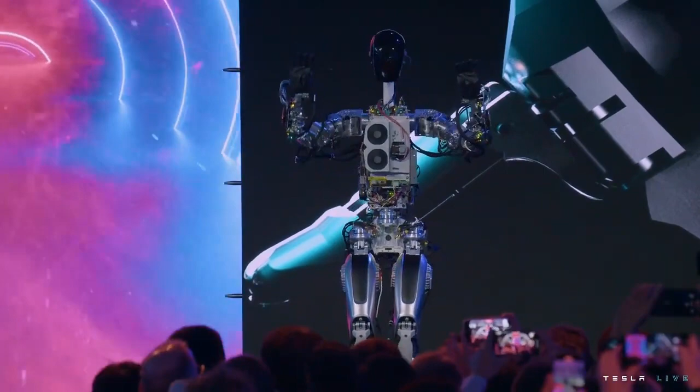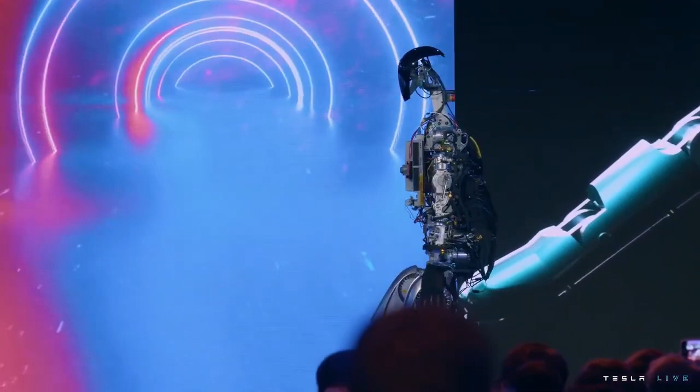So this is essentially the same full self-driving computer that runs in your Tesla cars, by the way. This is literally the first time the robot has operated without a tether. It was on stage tonight.

So the robot can actually do a lot more than we just showed you. We just didn't want it to fall on its face. So we'll show you some videos now of the robot doing a bunch of other things, which are less risky. We should close the screen, guys.

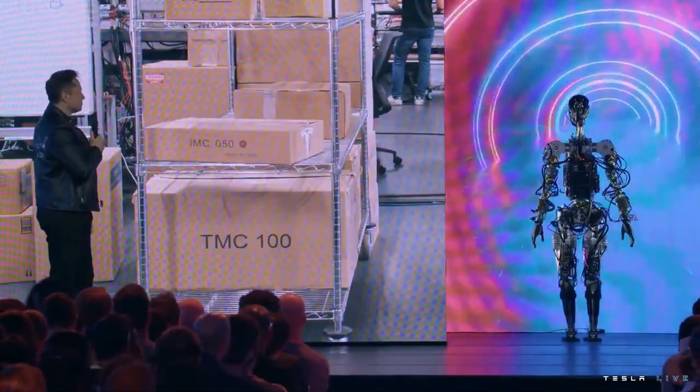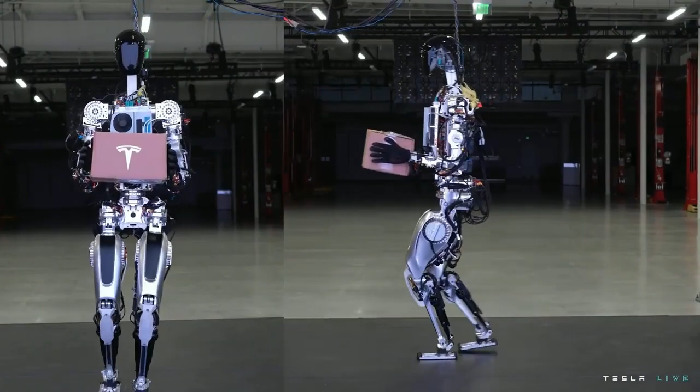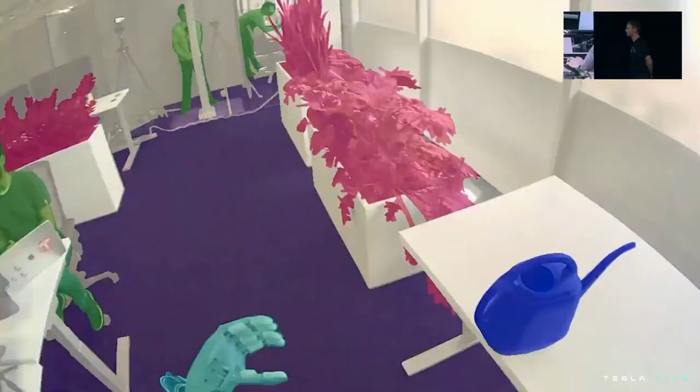We wanted to show a little bit more what we've done over the past few months with the bot, just walking around and dancing on stage. Just humble beginnings, but you can see the autopilot neural networks running as is, just retrained for the bot directly on that new platform. That's my watering can. When you see a rendered view, that's the robot, that's the world the robot sees. So it's very clearly identifying objects, like this is the object it should be picking up.

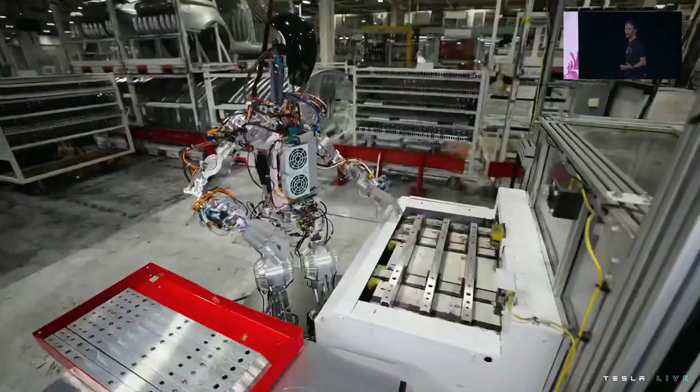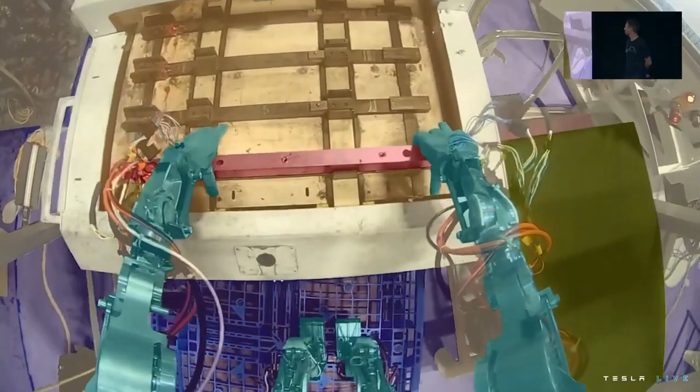We use the same process as we did for Autopilot to collect data and train neural networks that we then deploy on the robot. That's an example that illustrates the upper body a little bit more, and something that we'll try to nail down to perfection over the next few months. This is really an actual station in the Fremont factory that it's working at.

And that's not the only thing we have to show today, right? Yeah, absolutely.

So what you saw was what we call Bumble C, that's our sort of rough development robot using semi-off-the-shelf actuators. But we've actually gone a step further than that already. The team's done an incredible job, and we actually have an Optimus bot with fully Tesla-designed and built actuators, battery pack, control system, everything. It wasn't quite ready to walk, but I think it will walk in a few weeks. We wanted to show you the robot, something that's actually fairly close to what will go into production, and show you all the things it can do. So let's bring it out.

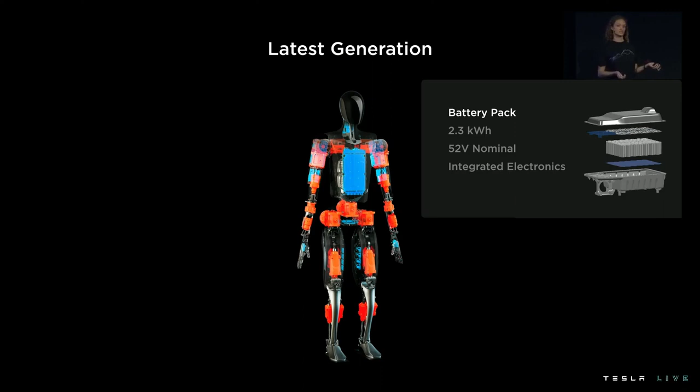Moving on to the brain. It's not in the head, but close, in the torso, acting as our central computer. Tesla already ships full self-driving computers in every vehicle we produce, and we want to leverage both the autopilot hardware and software for the Humanoid platform. But because the requirements and form factor are different, we're changing a few things. It still does everything a human brain does: processing vision data, making split-second decisions based on multiple sensory inputs, and handling communications. It's equipped with wireless connectivity and audio support, plus hardware-level security features to protect both the robot and the people around it.

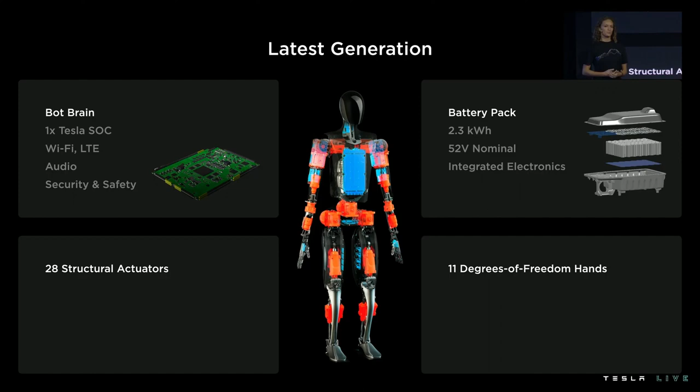Now that we have our core, we need some limbs. We'd love to show you a bit about our actuators and our fully functional hands. But before that, I'd like to introduce Malcolm, who's going to speak about our structural foundation for the robot.

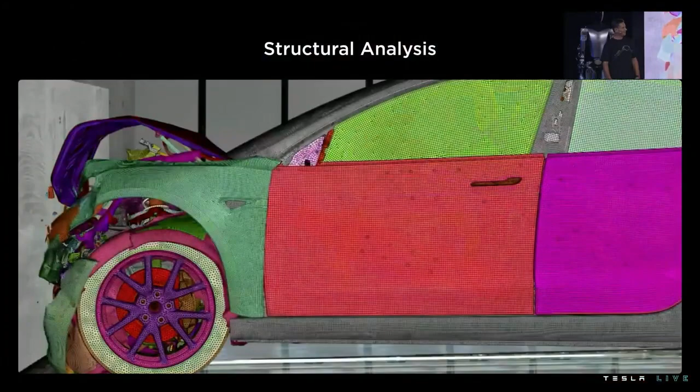Thank you, Lizzie. Tesla has the capabilities to analyze highly complex systems, and they don't get much more complex than a crash. You can see here a simulated crash from Model 3 superimposed on the actual physical crash—it's incredibly accurate. To give you an idea of the complexity, this model includes every nut, bolt, washer, and spot weld, with 35 million degrees of freedom. It's quite amazing, and it's true that without models like this, we wouldn't be able to make the safest cars in the world.

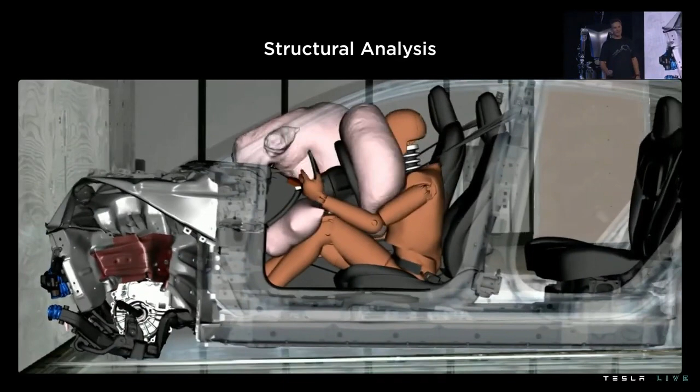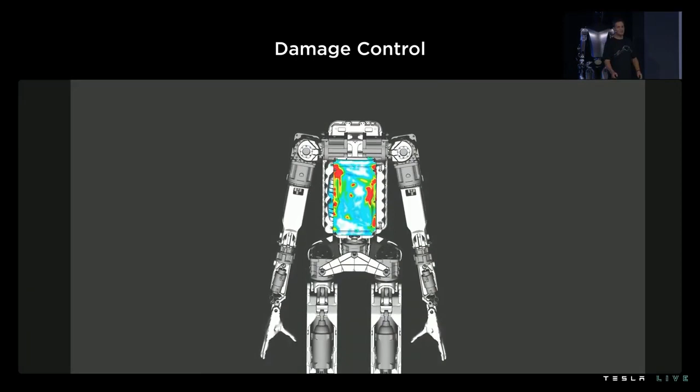So can we utilize our capabilities and methods from the automotive side to influence a robot? We can make a model using the same crash software to make it fall down. The purpose is to ensure that if it falls, ideally it doesn't, but the damage is only superficial. We don't want it to break its gearbox or arms—that's the equivalent of a dislocated shoulder, difficult and expensive to fix. We want it to dust itself off and get on with the job.

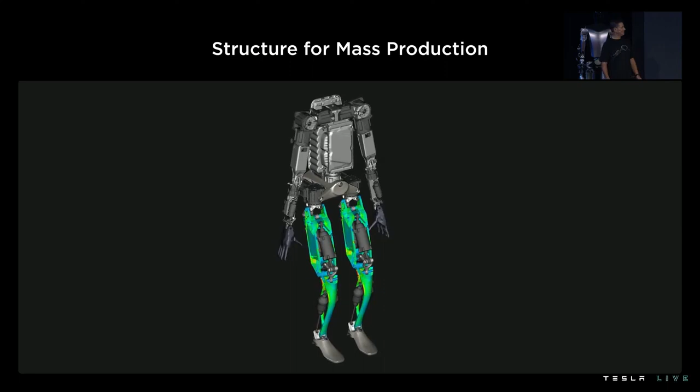We can also take the same model and drive the actuators using inputs from a previously solved model, bringing it to life. This produces the motions for tasks we want the robot to do—picking up boxes, turning, squatting, walking upstairs. Whatever the set of tasks, we can play them through the model. This shows simple walking, which lets us create the stresses in all the components, helping us optimize them.

These aren't dancing robots—this is the modal behavior, the first five modes of the robot. Typically when people make robots, they ensure the first mode is up around 10 hertz, to make the controls of walking easier. It's very difficult to walk if you can't guarantee where your foot is wobbling around. That's fine if you're making one robot.

We want to make thousands, maybe millions. We don't have the luxury of making them from carbon fiber and titanium—we want to make them from plastic, which isn't as stiff, so we can't hit those high targets. I call them 'dumb targets'—we have to make it work at lower targets. Is that going to work? Well, if you think about it, we're just bags of soggy jelly and bones—we're not high frequency. If I stand on my leg, I don't vibrate at 10 hertz. People operate at low frequency, so we know the robot can too; it just makes controls harder. So we take the modal data and stiffness information and feed that into the control system, which allows it to walk.

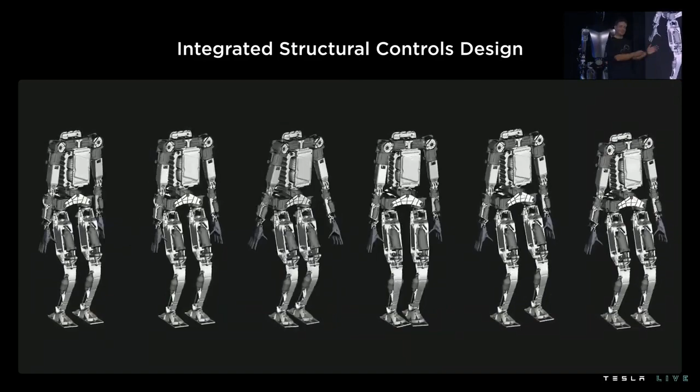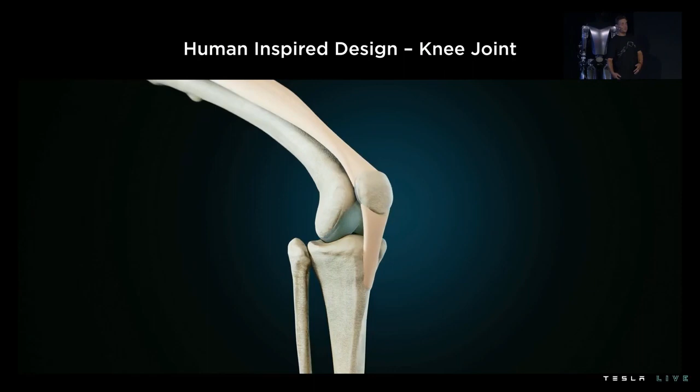Changing tack slightly, looking at the knee: we can take inspiration from biology to see what the mechanical advantage of the knee is. It turns out to represent something quite similar to a 4-bar link, which is quite non-linear. That's not surprising, because when you bend your leg, the torque on your knee is much greater when bent than when straight, so you'd expect a non-linear function. In fact, the biology is non-linear, and this matches it quite accurately.

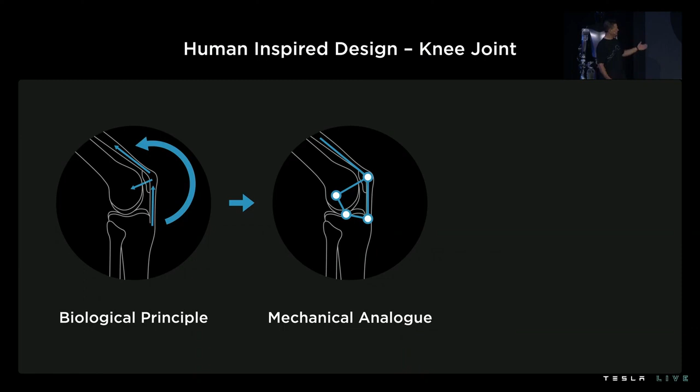So that's a representation. The knee is obviously not physically a 4-bar link, but as I said, the characteristics are similar. Me bending down isn't very scientific though, so let's be a bit more scientific.

We've played all the tasks through this graph, showing picking things up, walking, squatting - the tasks we did on the stress test. That's the torque seen at the knee plotted against knee bend on the horizontal axis. This shows the requirement for the knee to do all these tasks. I've put a curve through it, surfing over the top of the peaks, and that says this is what's required to make the robot do these tasks.

So if we look at the 4-bar link, that's the green curve, and it shows that the non-linearity of the 4-bar link has actually linearized the characteristic of the force. What that really says is it's lowered the force - that's what makes the actuator have the lowest possible force, which is the most efficient.

We want to burn energy up slowly. What's the blue curve? That's actually what we'd get if we didn't have a 4-bar link - just an arm sticking out of the leg with an actuator on it, a simple 2-bar link. That's the best we could do with a simple 2-bar link, and it shows that would create much more force in the actuator, which would not be efficient.

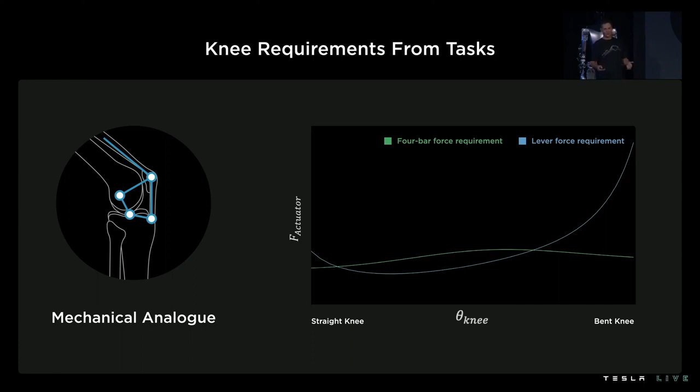So what does that look like in practice? As you'll see, it's very tightly packaged in the knee. You'll see it go transparent in a second - there's the 4-bar link, operating on the actuator. This is determining the force and the displacements on the actuator. I'll now pass you over to Konstantinos, who'll tell you a lot more detail about how these actuators are made, designed, and optimized. Thank you.

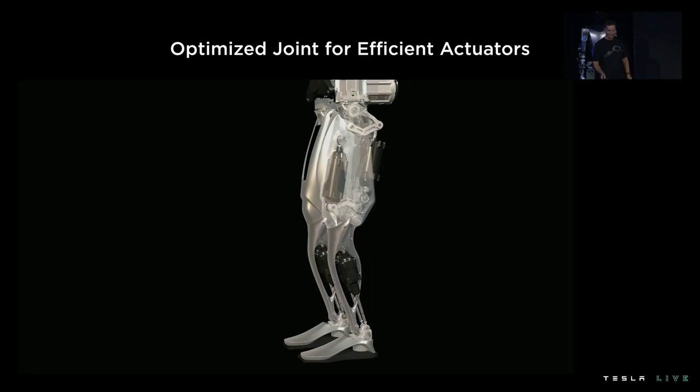So I would like to talk to you about the design process and the actuator portfolio in our robot. There are many similarities between a car and a robot when it comes to powertrain design. The most important thing that matters here is energy, mass, and cost. We are carrying over most of our design experience from the car to the robot.

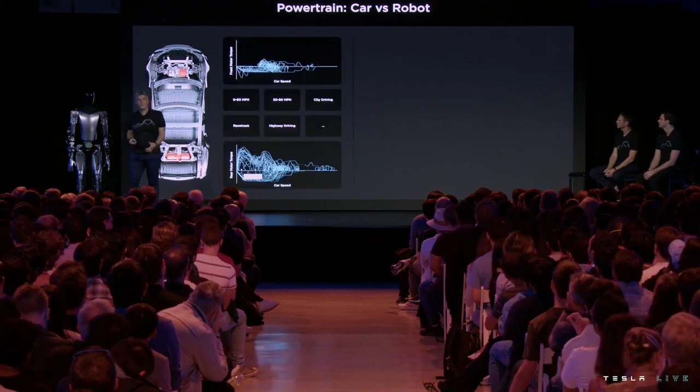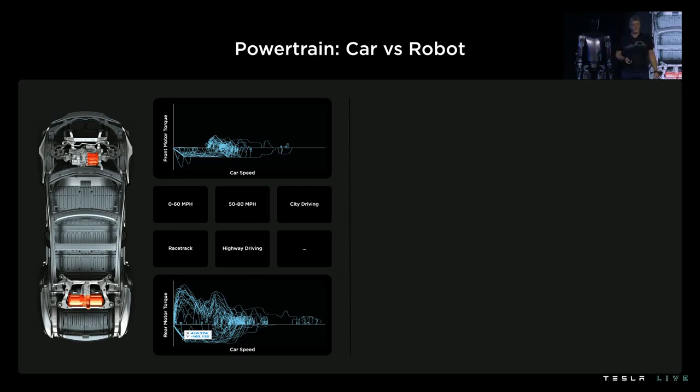In this particular case, you see a car with 2 drive units, used to accelerate the car for a 0 to 60 miles per hour time, or to drive a city drive cycle. While the robot has 28 actuators, it's not obvious what the tasks are at the actuator level.

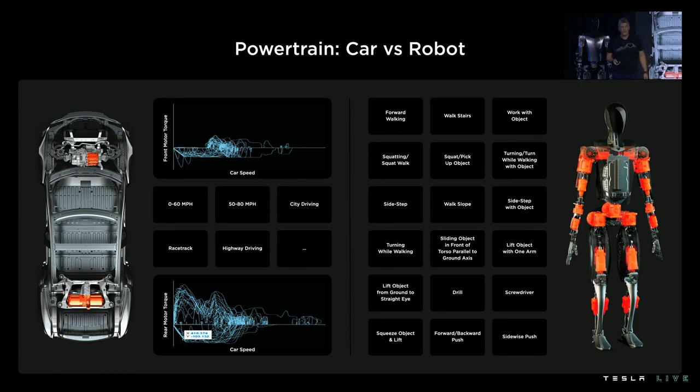We have higher level tasks, like walking or climbing stairs or carrying a heavy object, which need to be translated into joint specs. Therefore, we use our model that generates the torque speed trajectories for our joints, which is subsequently fed into our optimization model to run through the optimization process.

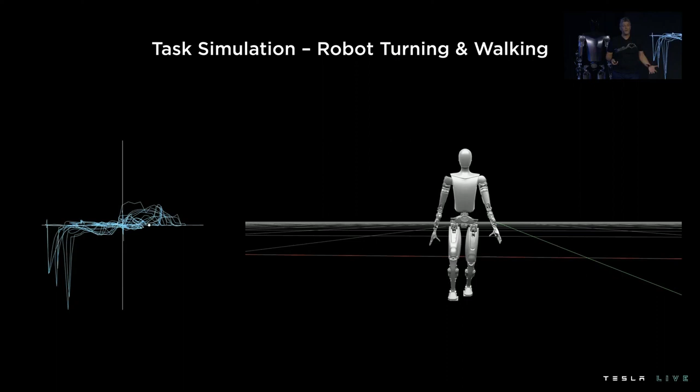This is one of the scenarios the robot is capable of doing, which is turning and walking. So when we have this torque speed trajectory, we lay it over an efficiency map of an actuator, and we're able, along the trajectory, to generate the power consumption and the cumulative energy for the task versus time.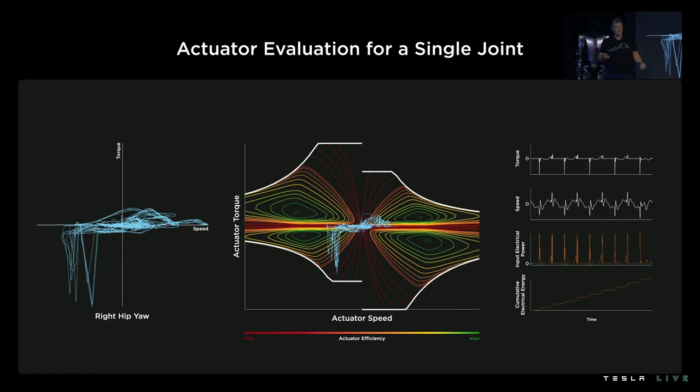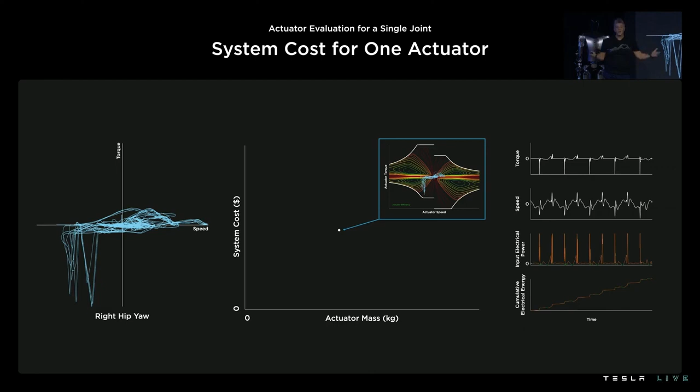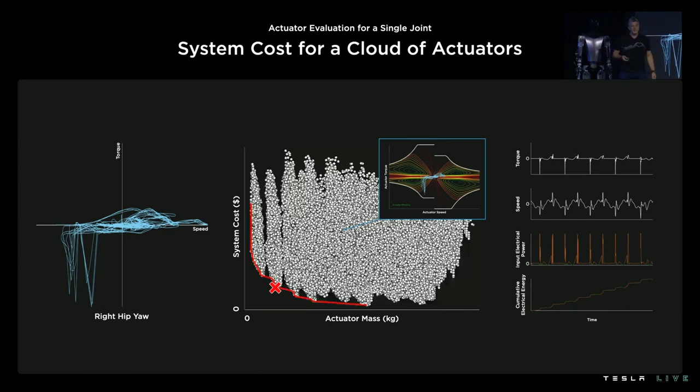This allows us to define the system cost for the particular actuator and put a single point into the cloud. Then we do this for hundreds of thousands of actuators by solving on our cluster. The red line denotes the Pareto front, which is the preferred area where we look for our optimal. The X denotes the preferred actuator design we've picked for this particular joint.

Now we need to do this for every joint. We have 28 joints to optimize, and we parse our cloud again for every joint spec, and the red X's this time denote the bespoke actuator designs for every joint. The problem is that we have too many unique actuator designs, and even if we take advantage of symmetry, there are still too many.

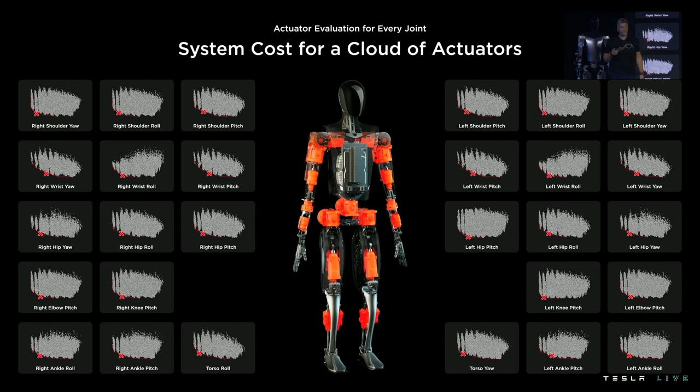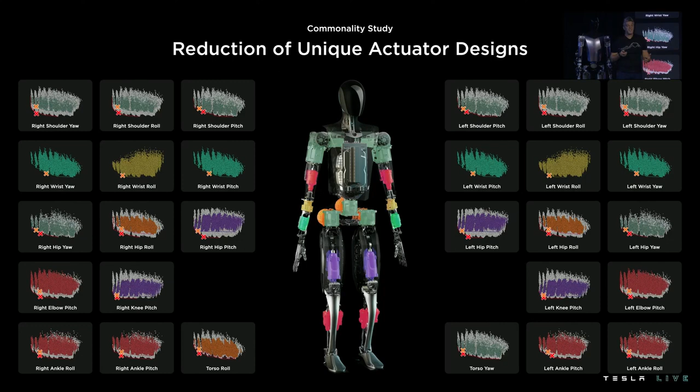In order to make something mass manufacturable, we need to reduce the amount of unique actuator designs. So we run something called a commonality study, where we parse our cloud again, looking this time for actuators that simultaneously meet the joint performance requirements for more than one joint at the same time. The resulting portfolio is 6 actuators, shown in a color map in the middle figure.

The actuators can also be viewed in this slide. We have 3 rotary and 3 linear actuators, all of which have a great output force or torque per mass.

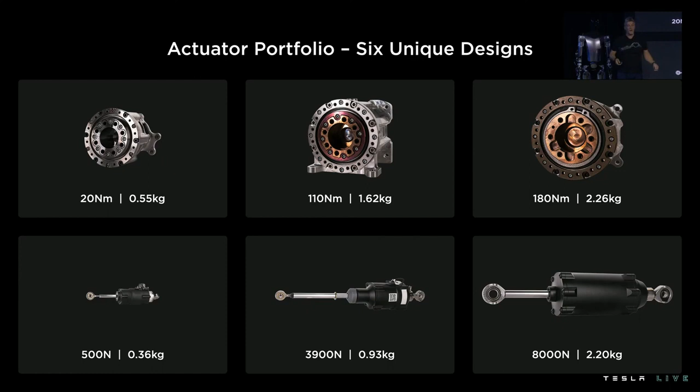The rotary actuator in particular has a mechanical clutch integrated on the high-speed side, an angular contact ball bearing on the high-speed side, and on the low-speed side a cross-roller bearing. The gear train is a strain-wave gear. There are 3 integrated sensors and a bespoke permanent magnet machine.

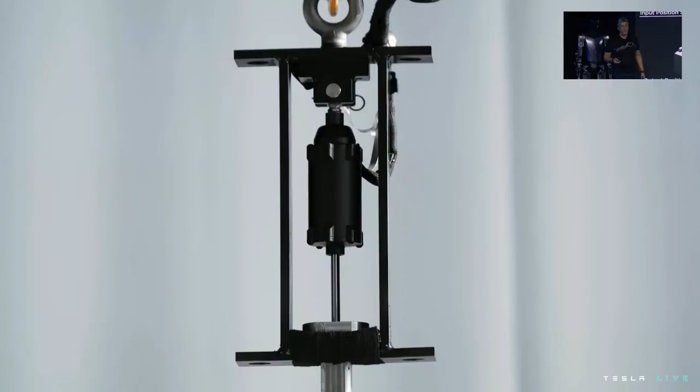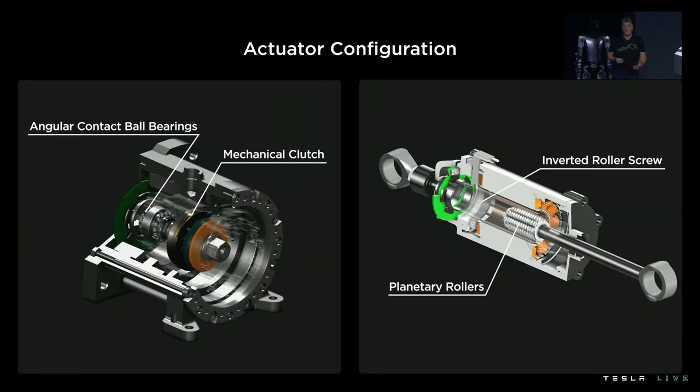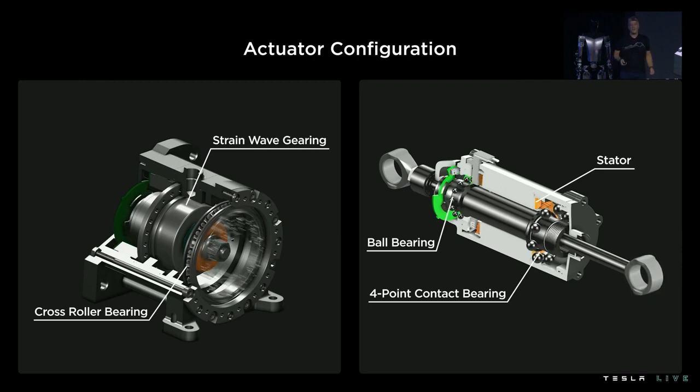The linear actuator has planetary rollers and an inverted roller screw as a gear train, which allows efficiency, compaction, and durability. So in order to demonstrate the force capability of our linear actuators, we set up an experiment to test it under its limits. I'll let you enjoy the video.

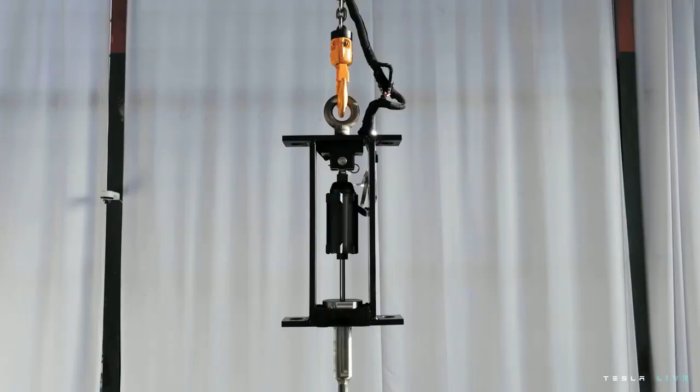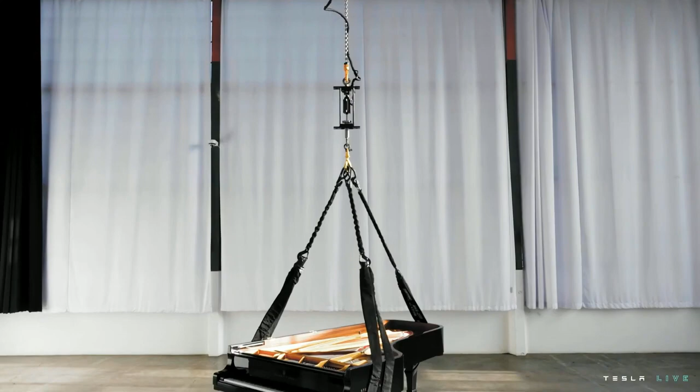So our actuator is able to lift a half-ton, 9-foot concert grand piano.

And this is a requirement, not something nice to have, because our muscles can do the same when they are direct driven. When directly driven, our quadricep muscles can do the same thing. It's just that the knee is an up-gearing linkage system that converts the force into velocity at the end effector of our heels, giving the human body agility. This is one of the main things that are amazing about the human body.

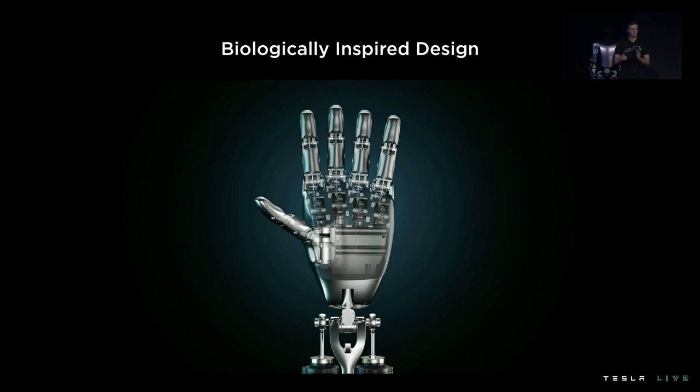Some basic stats about our hand: it has 6 actuators and 11 degrees of freedom. It has an in-hand controller, which drives the fingers and receives sensor feedback. Sensor feedback is really important to learn more about the objects we're grasping, and also for proprioception — that's the ability for us to recognize where our hand is in space.

One of the important aspects of our hand is that it's adaptive. This adaptability essentially involves complex mechanisms that allow the hand to adapt to the objects being grasped. Another important part is that we have a non-back drivable finger drive. This clutching mechanism allows us to hold and transport objects without having to turn on the hand motors.

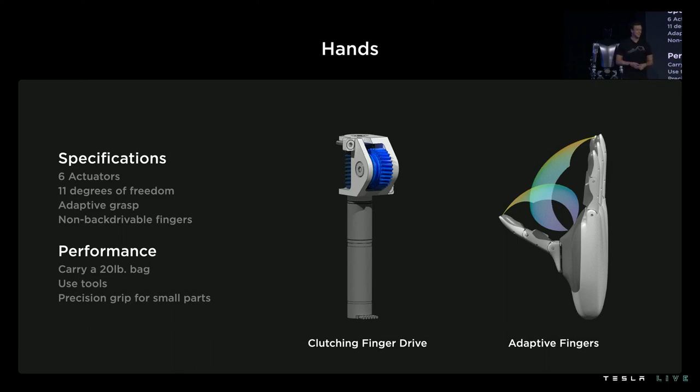All right, so all those cool things we've shown earlier in the video were possible in just a matter of a few months, thanks to the amazing work we've done on Autopilot over the past few years. Most of those components ported quite easily over to the bot's environment. If you think about it, we're just moving from a robot on wheels to a robot on legs. So some of the components are pretty similar, and some others require more heavy lifting.

For example, our computer vision neural networks were ported directly from Autopilot to the bot's situation. It's exactly the same occupancy network, which we'll talk about in more detail later with the Autopilot team, that is now running on the bot in this video. The only thing that changed really is the training data, which we had to recollect.

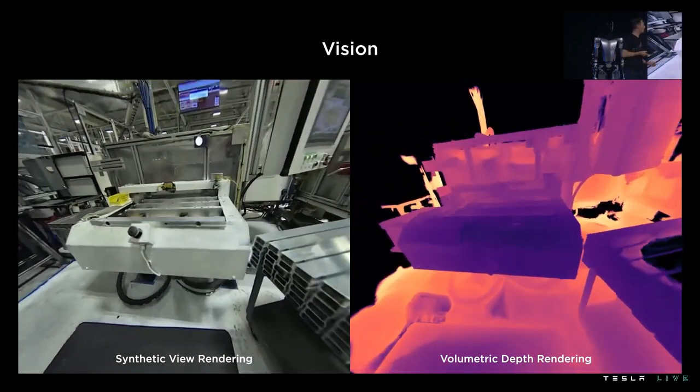We're also trying to find ways to improve those occupancy networks using work made on neural radiance fields to get really great volumetric rendering of the bot's environment. For example, here, some machinery that the bot might have to interact with.

Another interesting problem to think about: in indoor environments, mostly with absence of GPS signal, how do you get the bot to navigate to its destination? Say, for instance, to find its nearest charging station. So we've been training more neural networks to identify high-frequency features, key points within the bot's camera streams, and track them across frames over time as the bot navigates through its environment. We're using those points to get a better estimate of the bot's pose and trajectory within its environment as it's walking.

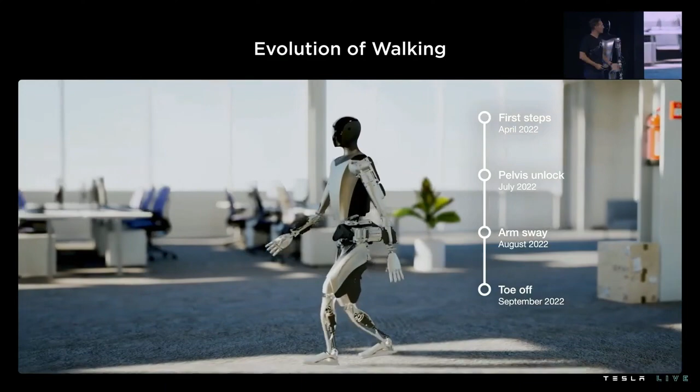We also did quite some work on the simulation side. This is literally the Autopilot simulator, to which we've integrated the robot's locomotion code. This is a video of the motion control code running in the Autopilot simulator, showing the evolution of the robot's walk over time. As you can see, we started quite slowly in April and started accelerating as we unlocked more joints and deployed more advanced techniques, like arm balancing, over the past few months.

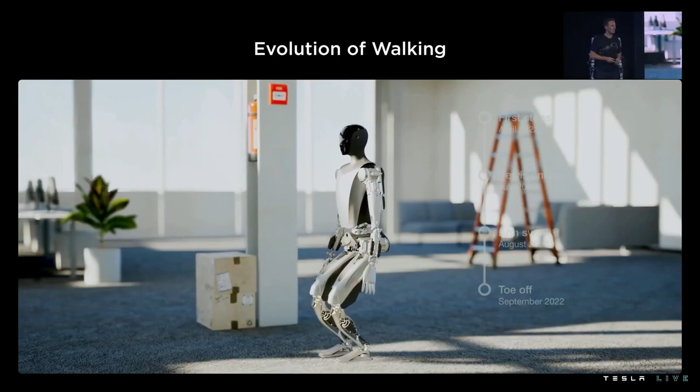So locomotion is specifically one component that's very different as we're moving from the car to the bot's environment. I think it warrants a little bit more depth, and I'd like my colleagues to start talking about this now.

Thank you, Milan. Hi, everyone. I'm Felix. I'm a robotics engineer on the project, and I'm going to talk about walking.

Walking seems easy, right? People do it every day. You don't even have to think about it. But there are some aspects of walking which are challenging from an engineering perspective. For example, physical self-awareness — that means having a good representation of yourself. What is the length of your limbs? What is the mass of your limbs? What is the size of your feet? All that matters. Also, having an energy-efficient gait — you can imagine there are different styles of walking, and not all of them are equally efficient. Most important, keep balance, don't fall. And of course, also coordinate the motion of all your limbs together. Now, humans do all of this naturally, but as engineers or roboticists, we have to think about these problems.

In the following, I'm going to show you how we address them in our locomotion planning and control stack. So we start with locomotion planning and our representation of the bot — that means a model of the robot's kinematics, dynamics, and contact properties. Using that model and the desired path for the bot, our locomotion planner generates reference trajectories for the entire system, meaning feasible trajectories with respect to the assumptions of our model.

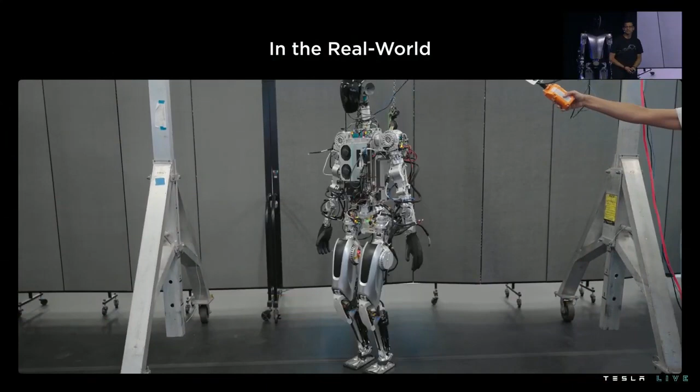But we are missing a few key pieces here which will make it walk. Now, as Felix mentioned, the motion planner is using an idealized version of itself and a version of reality around it. This is not exactly correct. It also expresses its intention through trajectories and wrenches. Wrenches are forces and torques that it wants to exert on the world to locomote.

Reality is way more complex than any sim or model. Also, the robot is not simplified. It's got vibrations and modes, compliance, sensor noise, and on and on.

So what does that do to the real world when you put the bot in the real world? Well, the unexpected forces cause unmodeled dynamics, which essentially the planner doesn't know about, and that causes destabilization, especially for a system that is dynamically stable like biped locomotion.

Now we have all the pieces we need in order to close the loop. So we use our better bot model, we use the understanding of reality that we've gained through state estimation, and we compare what we want versus what we expect reality is doing to us in order to add corrections to the behavior of the robot. Here, the robot certainly doesn't appreciate being poked, but it does an admirable job of staying upright.